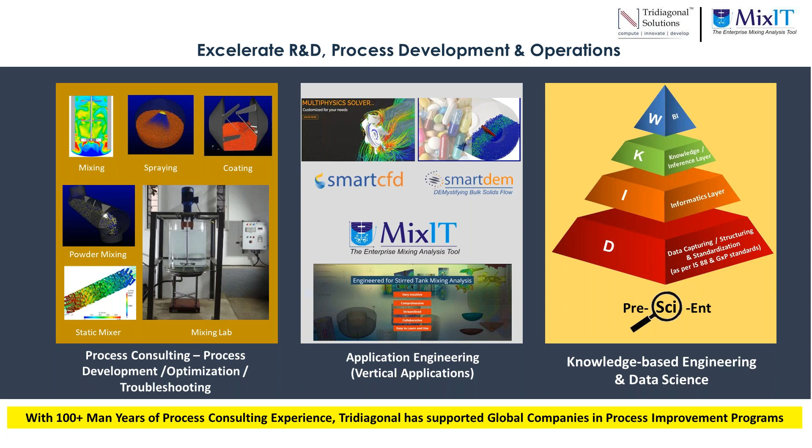With 12 plus years of experience providing the most advanced technologies and solutions to our customers, we work with our customers hand in hand to provide them end-to-end solutions, support, and training through our consulting practices, making sure we are able to solve their process problems and improve their process performance using innovative technologies. So with this brief introduction to Tridiagonal, let's start our webinar.

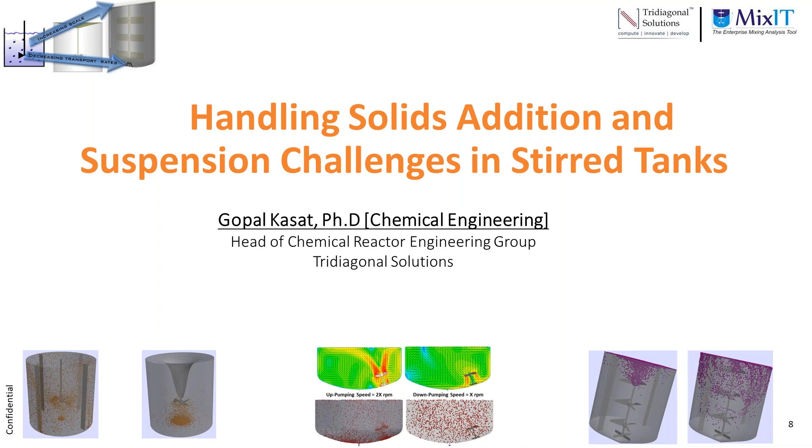I am Gopal Kasat. I am heading the Chemical Reactor Engineering Group at Tridiagonal Solutions. Today we will be discussing how we can handle the solids addition and suspension challenges in stirred tanks.

So what is solid liquid mixing? We encounter it in our day-to-day life, for example when we are adding sugar in water. If we do not stir it with a spoon, the sugar is going to settle at the bottom.

That simple example helps us understand how important it is to suspend solids in the process industry, in our chemical processes, so that maximum area is available and we get effective mass transfer and effective process control when dealing with solid liquid operations.

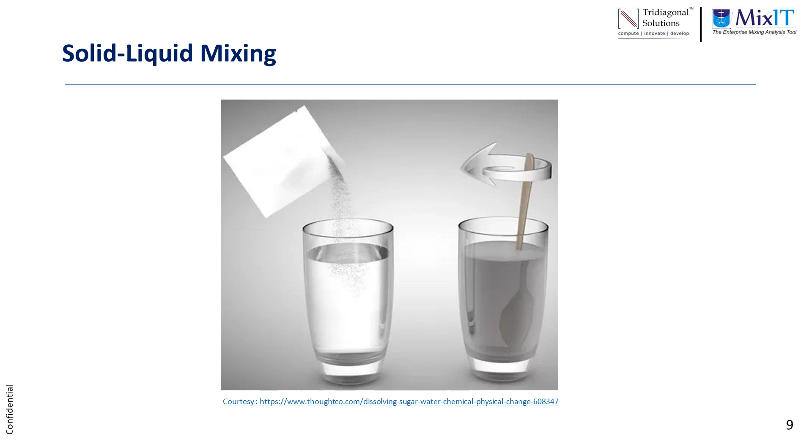When we think about solid liquid mixing in the process industry, we encounter various processes where it is very important, like dissolution, where, as I said, we are dissolving sugar in water. That's a very simple example, but we encounter this day to day in the process industry.

Along with dissolution, we have crystallization, where we need to control the particle size distribution and make sure the crystals are suspended and we have the appropriate particle size distribution.

Precipitation, suspension polymerization, for example forming of resin beads, where we need to control the particle size of a resin bead. In terms of solid catalyzed reactions, we need to suspend the solid so that maximum surface area of the catalyst is available for the reaction.

In the food and beverage industry, we encounter powder dispersion, and in bioreactors, we need to suspend biomass, and there also we encounter the solid liquid mixing problem during our day-to-day process industry operations.

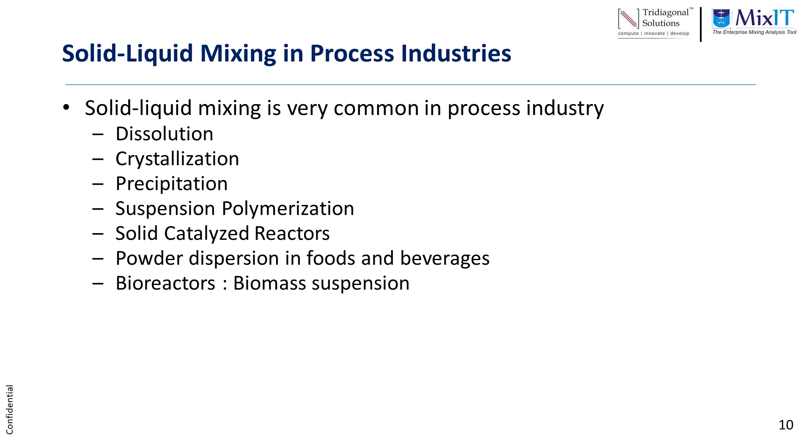So what type of typical things do we do in these problems? Either we are trying to suspend the settled solids, which are typically heavier solids that tend to settle, and we need to ensure they are suspended, or we are trying to draw down the floating solids. Typically, solids are added at the surface, and we need to make sure we are drawing them down and dispersing them properly in the mixing tank.

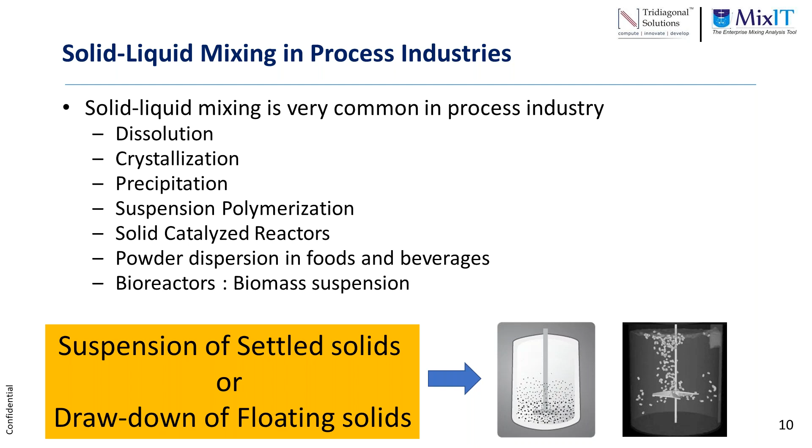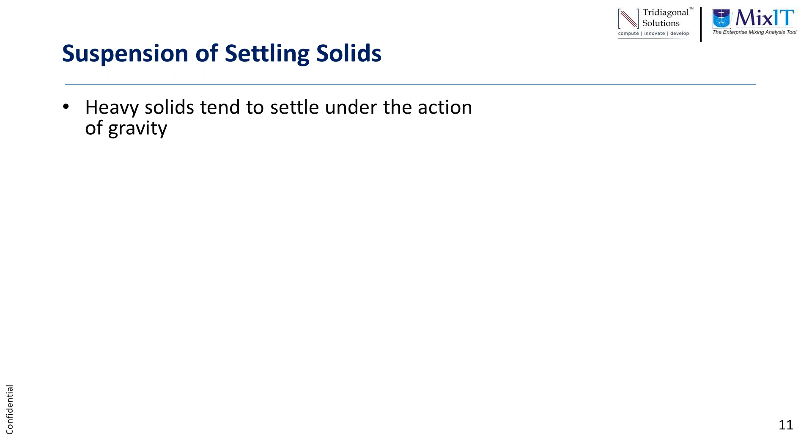So let's understand about suspension of settling solids. Typically with heavy solids, the solids tend to settle under the action of gravity. In order to suspend the solids, the fluid velocities near the vessel bottom need to overcome the settling velocity of the solids.

The turbulent eddies generated because of the fluid action would lift the solids, and then the solids will be suspended in the bulk fluid using the bulk flow generated by the impeller. This is typically the action we encounter in mixing tanks.

The critical design parameters are - we typically use a term called minimum suspension speed. That is the minimum speed at which the solids are suspended off the vessel bottom. They may not be uniformly dispersed, but they are just suspended off the vessel bottom.

In some cases, we need to ensure solids are uniformly dispersed, so we are looking at the level of suspension as well. We can define various levels of suspension based on the type of process we are dealing with: partial suspension, where solids are just suspended off the vessel bottom; complete suspension, where solids are lifted off the bottom and dispersed in the bulk volume; and uniform suspension, where solids concentration is uniform in every region of the bulk fluid volume.

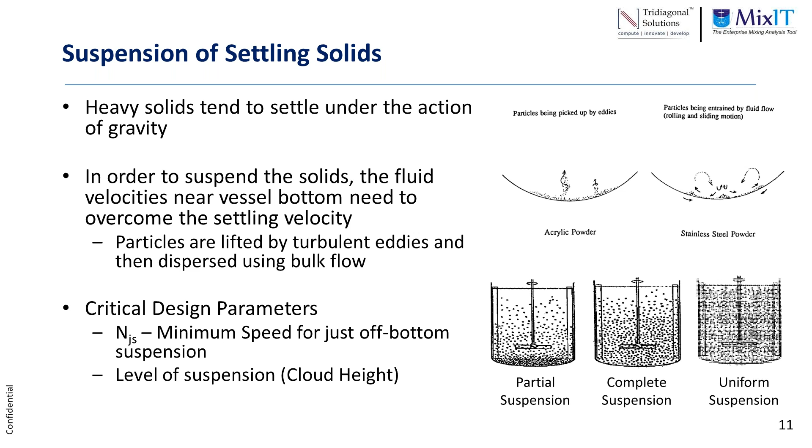So we see that settling solids settle under the action of gravity. Let's understand what happens with floating solids. Solids float due to density difference - the solids are lighter than liquid, hence they may float.

Some solids may have poor wettability, and if we are adding them from the liquid surface, they may float. Even if we are adding lumps of solid, because of the low density, those lumps may also float.

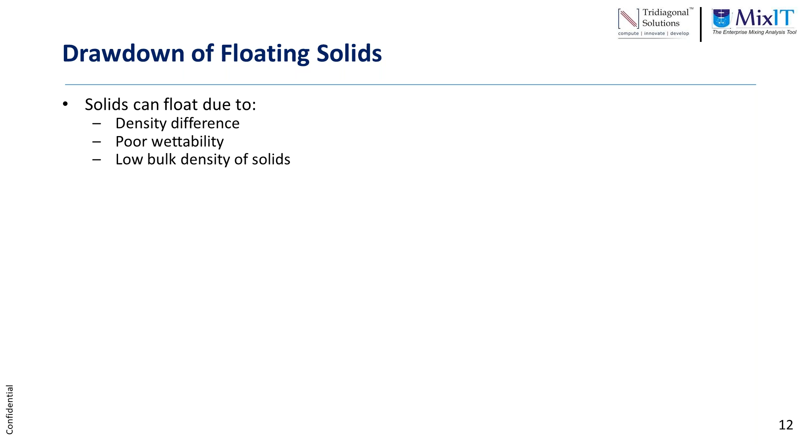So what action is required to suspend or disperse these floated solids? Typically, due to buoyancy and surface tension, the solids will float, and we need to overcome these forces using gravity, drag, and turbulent dispersion force generated by the impeller, so that the solids are drawn down and dispersed in the bulk liquid.

The two key parameters of interest here are NJS, the just suspension speed, and NJD, the just drawdown speed - the minimum speed at which solids are just drawn down from the liquid surface. We also have cloud depth, similar to cloud height or suspension height in the case of suspending heavy solids - here it's the depth to which the solids are incorporated into the liquid from the liquid surface.

While dispersing floating solids, vortex plays a very critical role. We need to ensure a controlled vortex, so that the surface turbulence created helps the initial dispersion of solids, and then the bulk motion of the fluid disperses the solids throughout the tank.

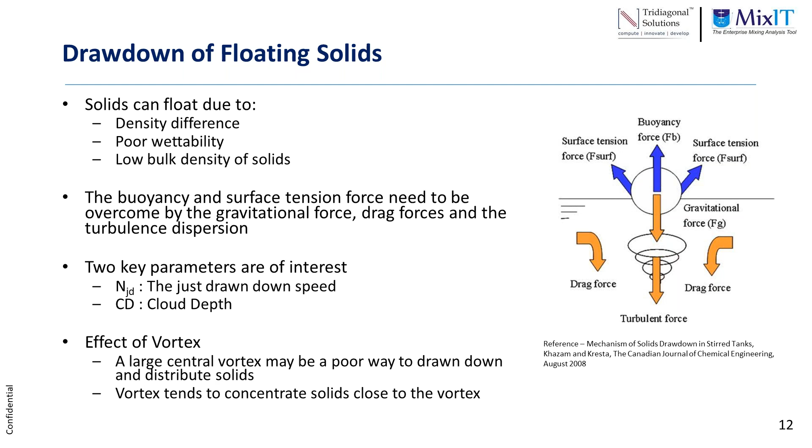So we understood what we need to do in terms of either suspending settled solids or drawing down floating solids and dispersing them. Now let's understand the typical design variables available that impact, or that we can change, to ensure we are able to suspend solids or disperse floating solids properly.

These design variables relate to typical reactor hardware. In the case of suspending settled solids, the bottom shape of the reactor plays a critical role. Also important is what type of impeller we are using - its size, location, and number of impellers. Various impellers are available: some are axial flow, some radial flow, and some provide mixed flow. Which type to use is one of the variables we can change to achieve better suspension.

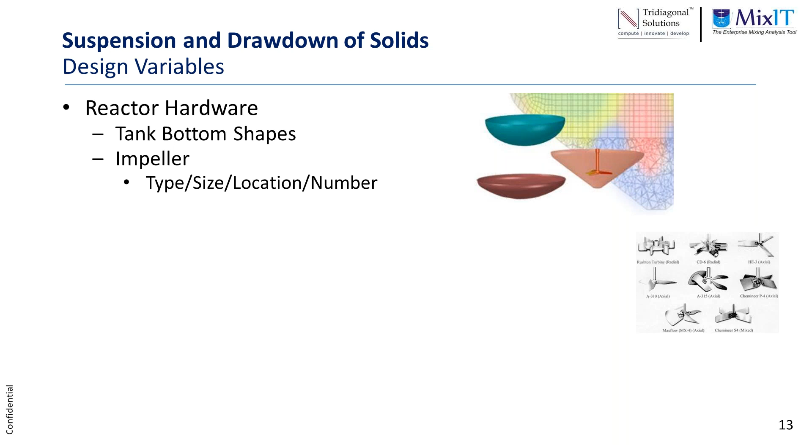One of the important parameters is baffling. How we control the baffling so that we ensure enough suspension as well as enough drawdown of solids is very critical. The baffling is very important. How we provide baffle and how we control the vortex by providing partial baffles may help improve the performance of powder dispersion when the powders are light.

Apart from reactor hardware, there are operating conditions we can control, such as the addition location. We may add at the surface or inside the bulk liquid based on flexibility of operation, or we can control the particle size so that particles are dispersed properly. The surface tension or interfacial tension between the particle and liquid, and the wettability, will play a critical role when suspending solids or dispersing them.

With these design variables, let's understand how we can ensure our operation is in a suitable regime where solids are suspended, and what parameters we can estimate to make sure the process, with given operating parameters, is able to suspend solids and disperse them uniformly.

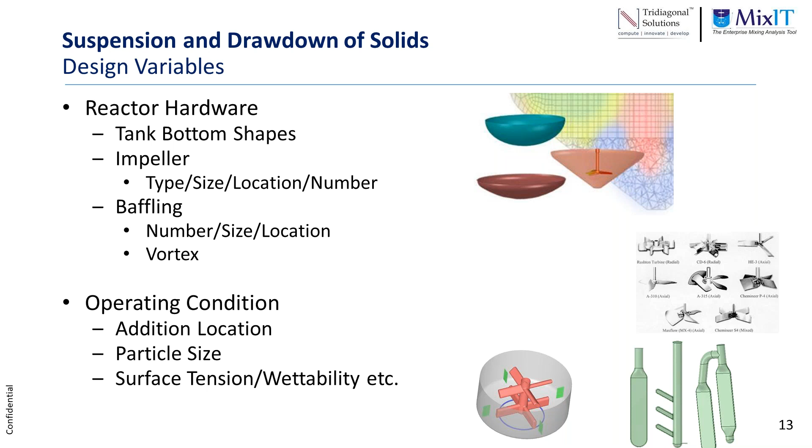For settling solids that need to be suspended, one critical parameter is estimation of minimum impeller speed for off-bottom suspension. There are various correlations in literature, and one well-known correlation is by Zwietering in 1958, where the critical impeller speed is calculated as a function of operating parameters like particle size, density of the particle, density of the liquid, the overall loading of solids, and reactor hardware parameters like impeller diameter.

However, when deriving this correlation, other parameters like the effect of impeller position, impeller to tank diameter ratio, or vessel bottom shape were all incorporated into one single parameter called the S factor. To use this correlation effectively, we need the right value of S factor so we can estimate the right suspension speed and operate at that speed to ensure solids are suspended.

This correlation was developed based on visual observation of the vessel bottom. Zwietering observed the vessel bottom and recorded the speed at which no particle remains stationary on the tank bottom for more than 1 or 2 seconds. That speed was noted as the critical or minimum impeller speed for solid suspension, and correlated with various operating and reactor hardware parameters.

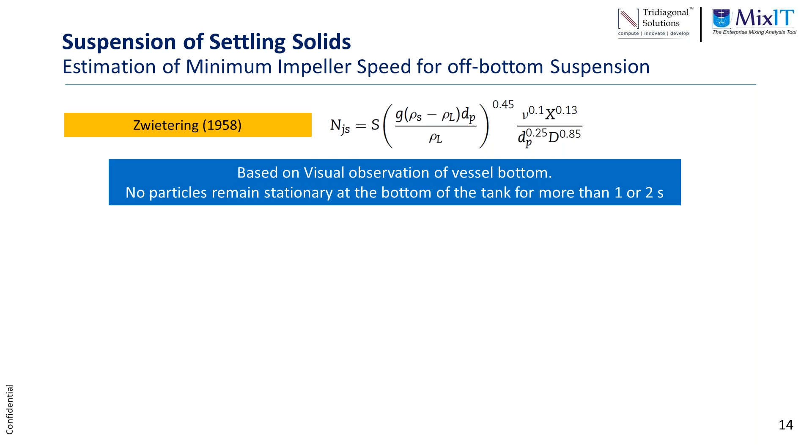Another correlation was proposed in 1978, where various parameters were incorporated, and in this case they also took into account the impeller to tank diameter ratio, with all other impacts recorded in one constant, the Z value.

This equation was based on an energy balance, where the hypothesis was that solids are suspended due to turbulent eddies. These turbulent eddies, at the vessel bottom, help lift the solids, and then the solids are suspended using the bulk flow.

More recently, in 2015, a correlation was published by Professor Grenville, where various parameters from earlier correlations were incorporated. Here they also incorporated the impact of impeller clearance, or impeller location with respect to impeller diameter, as well as the power number of the impeller, with all other parameters incorporated into the constant Z. This work was based on Davis 1986, which describes how particles are lifted, again based on turbulent eddies, and this correlation was backed by experimental data as well.

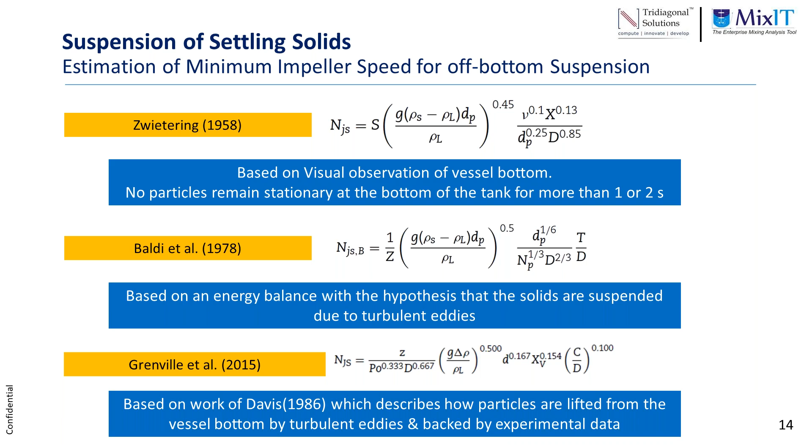So these are a few correlations generally used to calculate the minimum impeller speed for suspension of solids off the vessel bottom. There are many other correlations, but I just picked these three, which are heavily used in the industry.

In terms of suspending settling solids, there are also design guidelines available. Typically, while selecting the impeller, we need to ensure it is an axial flow impeller or a mixed flow impeller with an impeller to tank diameter ratio less than 0.5. Why axial flow? Because the axial flow from the impeller hits the tank bottom and creates turbulence there, which helps lift the solids better.

There are also guidelines available in terms of what should be the clearance and what should be the spacing between impellers if we are working on a multiple impeller system.

Similarly, for baffle arrangement, 4 standard baffles are recommended when we are dealing with suspending the heavy solids off the vessel bottom, and the dimensions of those baffles are also given in those recommendations.

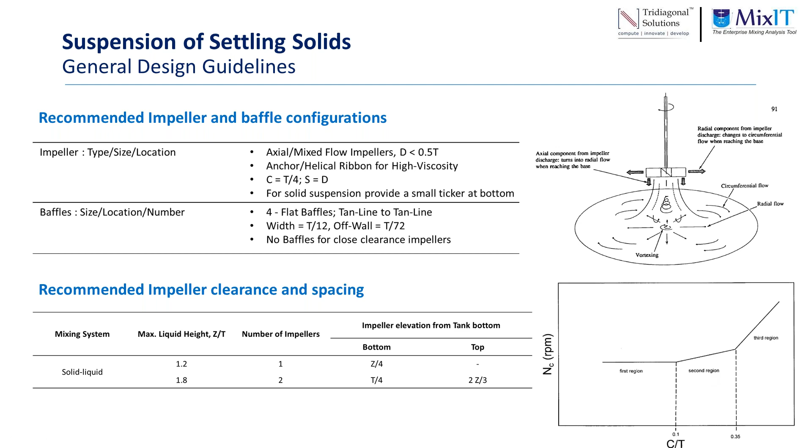So there are guidelines available in case of settling solids. However, for minimum impeller speed for drawdown of floating particles, there are few correlations available, but not much guidelines, because very little study has been done on how to draw down floating solids in the bulk liquid.

The first correlation for minimum impeller speed for particle drawdown was published in 1977, where the particle density, the difference between particle density and liquid density, and the impeller-to-tank diameter ratio were correlated, and then the constant was devised.

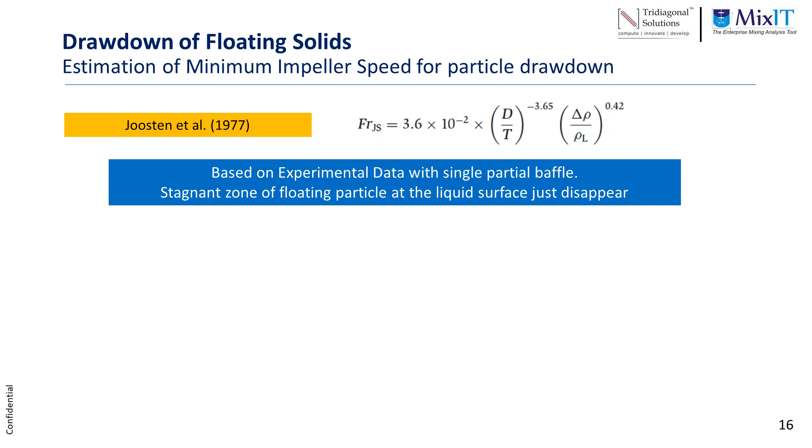This correlation was based on a fixed system where a single partial baffle with an axial flow impeller was used, and the definition was that there is no stagnant zone of floating particle at the liquid surface, and the particles just start to disappear from the liquid surface. That was the criteria to define the just drawdown speed.

Another correlation was published in 1999, where again a similar density difference between the solids and liquid, as well as the solids volume fraction and some other particle properties, were used, and all other impacts were grouped into one constant to estimate the just drawdown speed.

This was based on experimental data with again 4 baffles and a Rushton turbine impeller.

And then there are some general guidelines available in terms of how we can effectively draw down solids by controlling the vortex with a partial baffle and controlling the impeller bottom clearance, so as to draw down the floating solids.

In general, as we have seen, there are guidelines available to suspend solids or to design a system for suspension of solids. Then there are very few guidelines available for drawdown of floating solids. So there is very little literature available on how we can draw down the floating solids and disperse them.

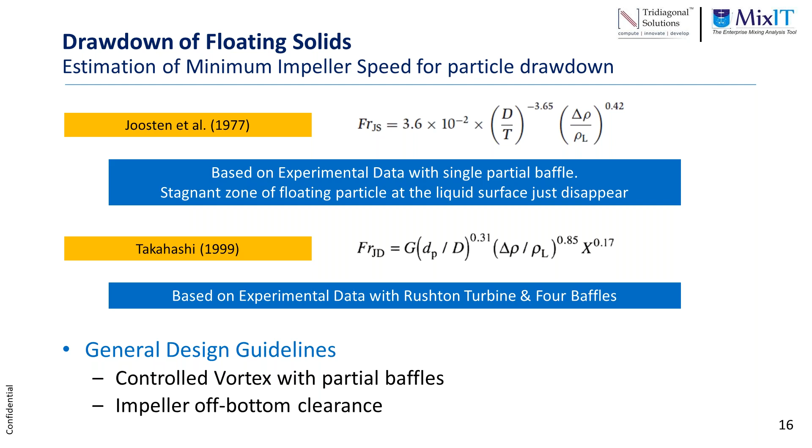Let's try to understand how these empirical correlations can be used, or what could be the limitations of these empirical correlations. So we have seen that for suspension of settling solids, we have a few equations, and for drawdown of floating solids, we have a few equations.

If we look at all these equations, they are heavily dependent on some constants, which are grouped in one of the parameters. For example, in case of Zwietering, we have the S factor. In the equation proposed in 1978 by Professor Baldi, we have the power number. A similar power number is used in correlations proposed by Professor Grenville, and also in case of particle drawdown speed estimation, we also have a constant.

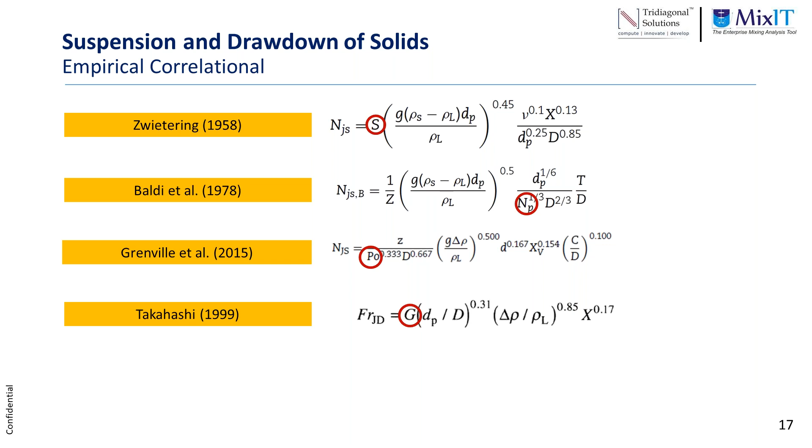These constants have been derived while proposing these correlations. However, they are for a very fixed system, as some of the authors have used experimental data only for Rushton turbine or only for pitch blade impeller. So there are limitations in that these constants are not available for all systems, and we know that we encounter very non-standard configurations in process industry.

So how can we use these correlations with non-standard systems, because they are very system specific and heavily depend upon an impeller constant like power number and some other factors which are dependent on the various vessel geometry and configuration of the impeller.

So with a few limitations in these correlations, let's see how we can use a few other technologies to ensure that we understand the solid suspension process, or the solid dispersion process, better, and improve our process performance by making sure that it is good.

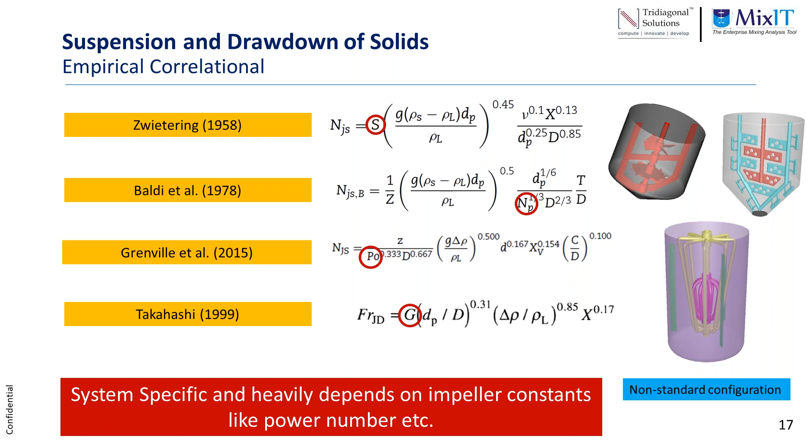With the computational fluid dynamics model, we can definitely use it to understand the performance of our process a priori, and use those results for analysis, troubleshooting, and scale up. The CFD model provides us detailed understanding of the flow pattern, and how the solids are getting suspended based on the flow pattern or the location of the impeller.

And we can make a judgment based on this: what is our suspension speed? We can estimate that, as well as understand if we need off-bottom suspension, what should be the speed, and if we need complete suspension, what should be the impeller speed. So we can use these detailed insights from the CFD model to improve performance of our solid suspension and dispersion processes.

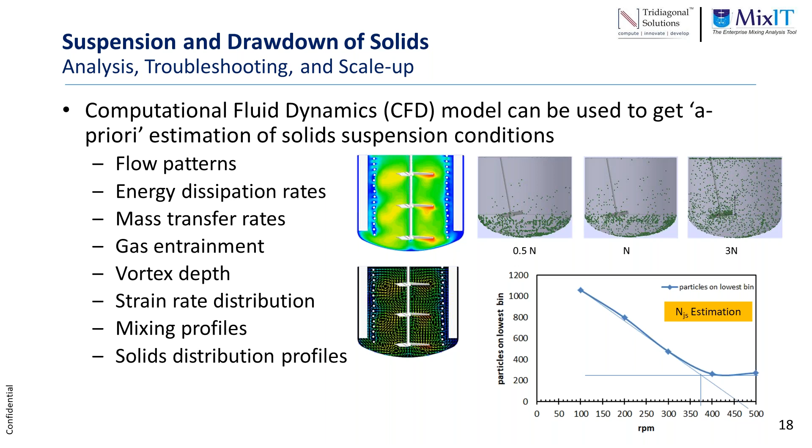Let's try to understand, using some case studies, how we can make use of this computational fluid dynamics model to improve our process performance. I will discuss some case studies where we have helped our customers, through our consulting practices, gain more insight into their suspension processes, and then improve them by making small changes in their systems.

So the first example is where we can understand how baffling will impact the overall process of suspension, and what could be the impact of baffles. If we look at the correlation for this system, the minimum speed for this system is 280 RPM, but that minimum speed is derived at a condition where we have 4 baffles.

Now what if we operate at the same speed, or maybe a higher speed than that, let's say 480 RPM, but we remove the baffles or change the baffle configuration? Let's try to understand, using computational models, what is happening and how the suspension will get impacted when we change the baffle configuration.

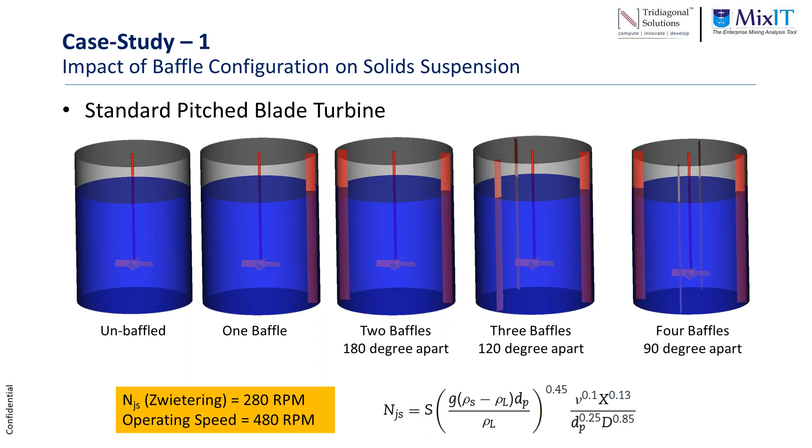So when we have no baffle, we get a vortex in the unbaffled tank, and we see if the solids are suspending. The solids are initially settled at the bottom, and we see that because the solids are only revolving on the vessel bottom, a few are getting suspended, but bulk of the solids are still settled on the vessel bottom.

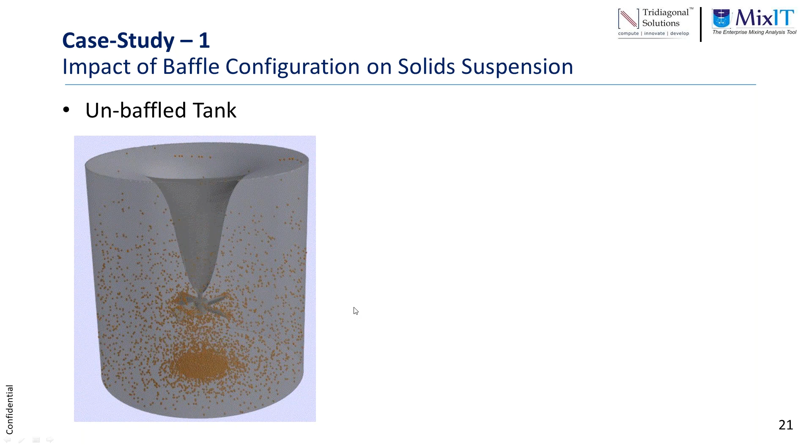Why is this happening? Because in the case of the unbaffled vessel, the flow is very rotational, and because of this rotational flow there is no actual motion of the solids to get dispersed. Bulk of the solids are settled below the impeller, and that's why even if we are operating at a speed almost 1.5 to 2 times higher than the just-suspension speed, we are not able to suspend the solids properly in the tank.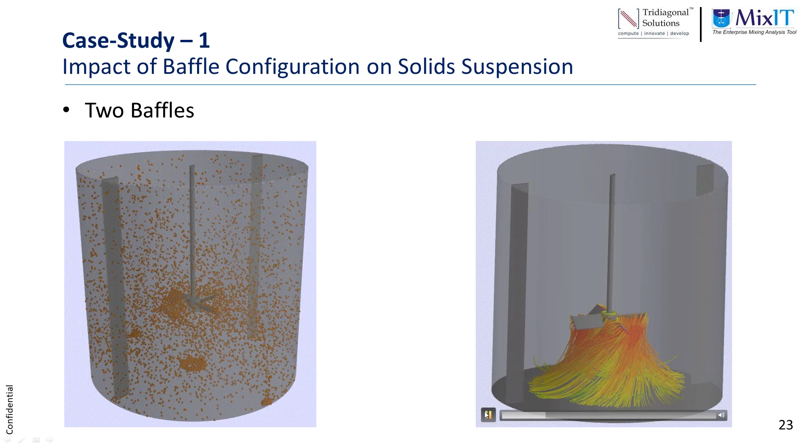Similarly, with the addition of two baffles, we see significant improvement. Now the solids are suspended more, and they are first swept to the vessel wall and suspended from there. There is some solid still settled near or below the impeller, which is the dead zone, and we can relate it to the flow pattern — now more of an axial component is there. The impeller flow is more directed towards the vessel bottom with addition of the second baffle, and it helps in improving the suspension.

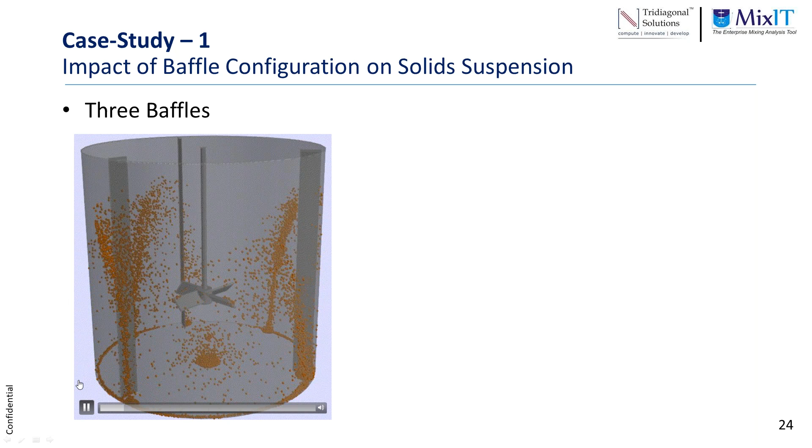Addition of a third baffle will again improve the performance. We do see that more solids are getting suspended now, and we get more uniformity in the suspension.

This flow pattern is again more on the axial side than the rotational side. The axial component is increasing in the flow, and the rotational component is reducing, and at 4 baffles we see very good suspension.

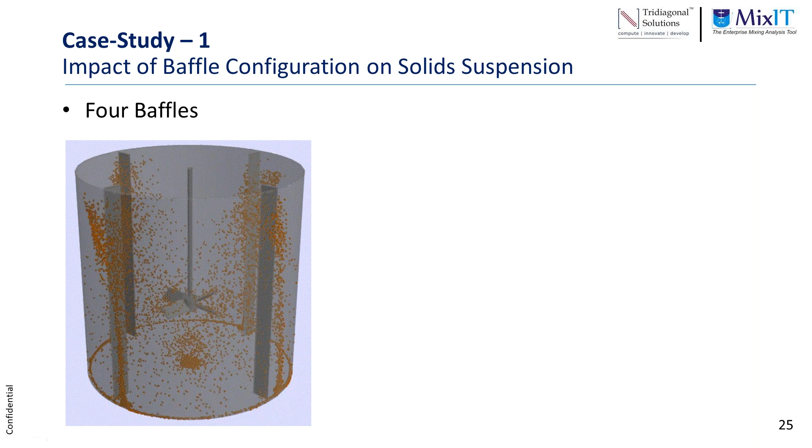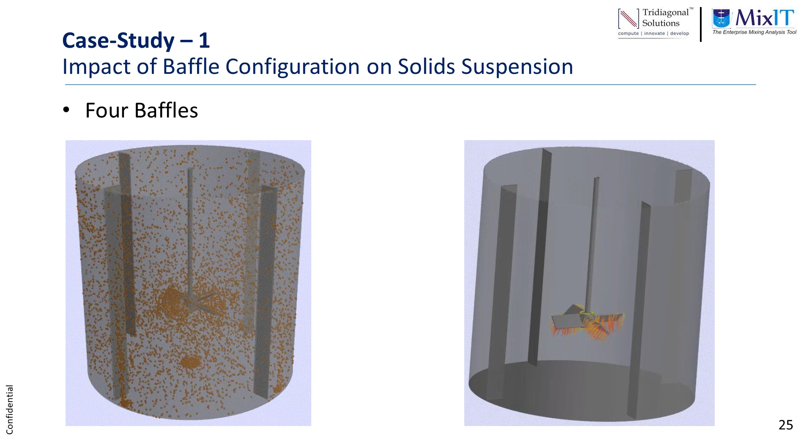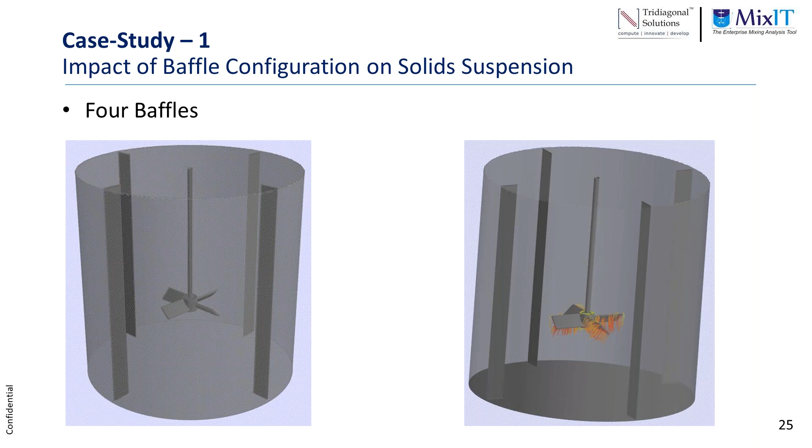The flow is more axial overall from the impeller, helping suspend the solids uniformly throughout the vessel region. This is how we can see that the suspension of solids is being impacted by the baffle configuration.

Similarly, we have helped our customer improve their drawdown process. With 4 flat baffles, we can see with the RCI impeller how the solids added at the liquid surface get dispersed properly.

However, if we only use one baffle, we get a lot of rotational flow, and the powder added at the liquid surface remains at the liquid surface. A small quantity gets drawn down along the shaft, with a lot of rotational flow.

Similarly, if we change the baffle, as is typical with a beavertail baffle in a glass-lined vessel, we see a similar rotational pattern with the RCI impeller, and we may not get better dispersion of the powder added at the liquid surface.

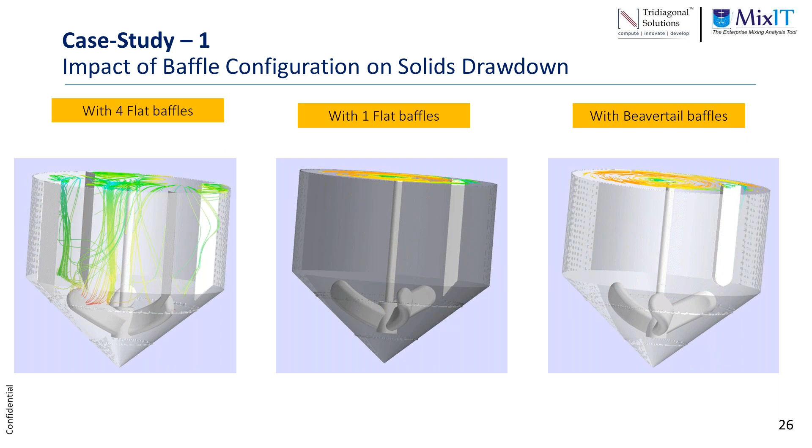Overall, we see a significant impact of baffle configuration on the solid suspension and dispersion process. Proper baffling needs to be ensured for efficient suspension and drawdown of solid particles. Available correlations do not explicitly account for the impact of baffles, so we use CFD simulation to get detailed insight, understand the quality of suspension better, and improve the process with proper baffling.

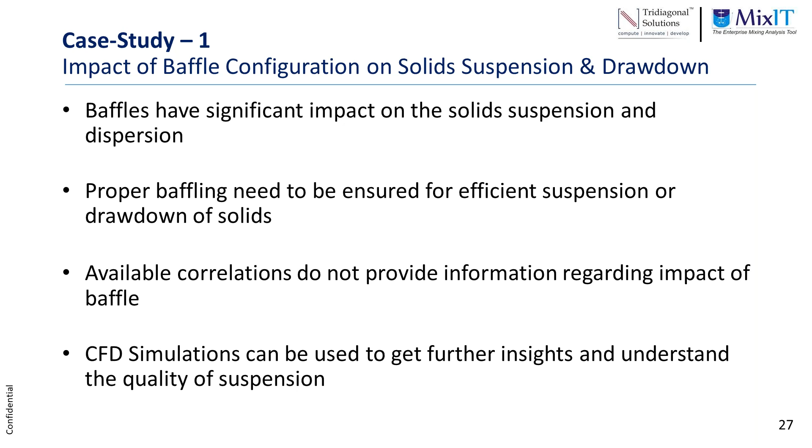The second example is where we helped our customer estimate NJS to improve their process. It was an RCI impeller with very different baffles, which were off-center, with 2 flat baffles and some probes incorporated in the vessel, operating at 320 RPM.

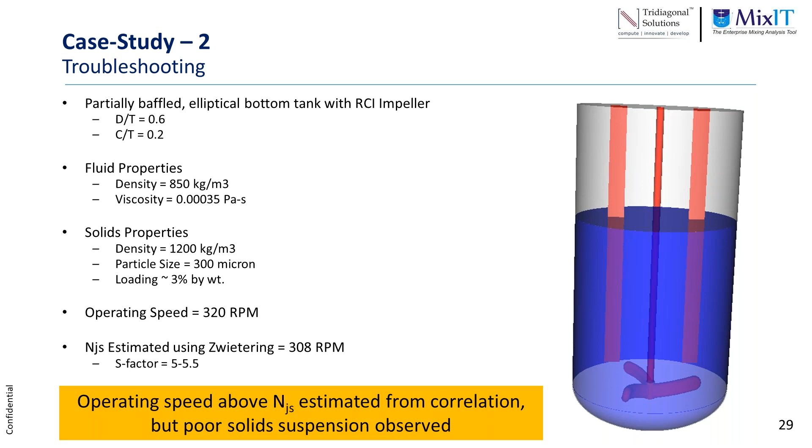The estimated suspension speed using the Zwietering correlation, with an S factor of about 5 to 5.5 for the RCI impeller, was about 308 RPM. The operating speed was much above the just-suspension speed, but still poor suspension was observed.

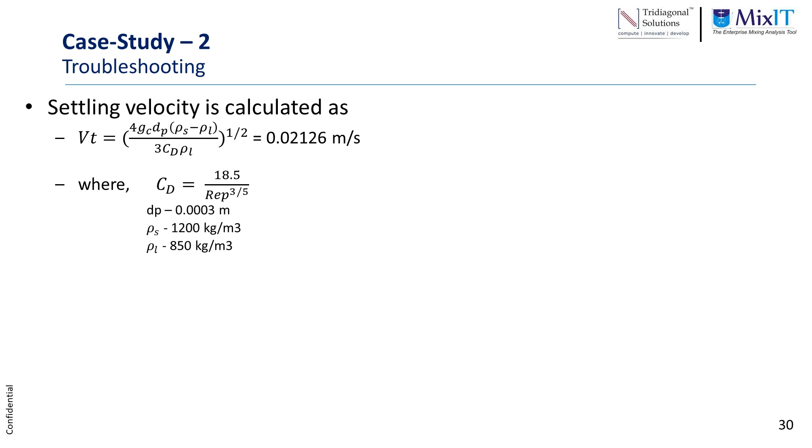So we calculated the settling velocity of the solid particles, then estimated the fluid velocities in the tank, and found that the fluid velocities near and below the impeller bottom are less than the settling velocities of the solids.

Calculating the upward velocities of the liquid that would lift the solid particles, we found those are also less than the settling velocity. This is why the velocity near the tank bottom is not sufficient to suspend the solids, resulting in a dead zone formed below the impeller.

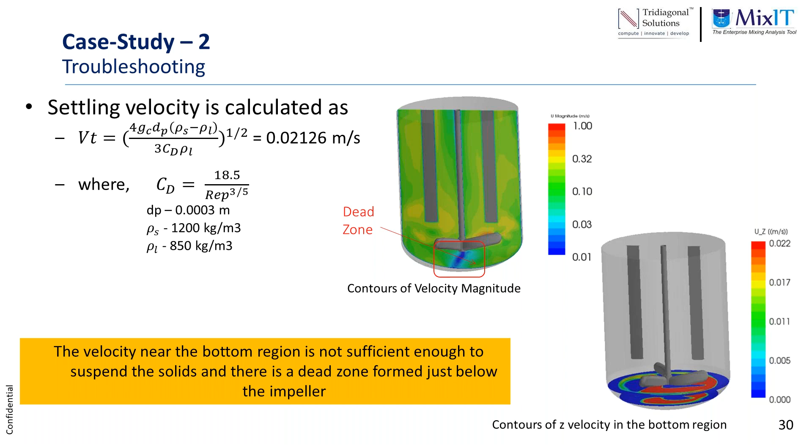Because of this dead zone, the solids keep rotating around the impeller and vessel bottom only, and are not suspended.

By changing the impeller position as well as the impeller speed, we were able to mitigate this problem of solid suspension.

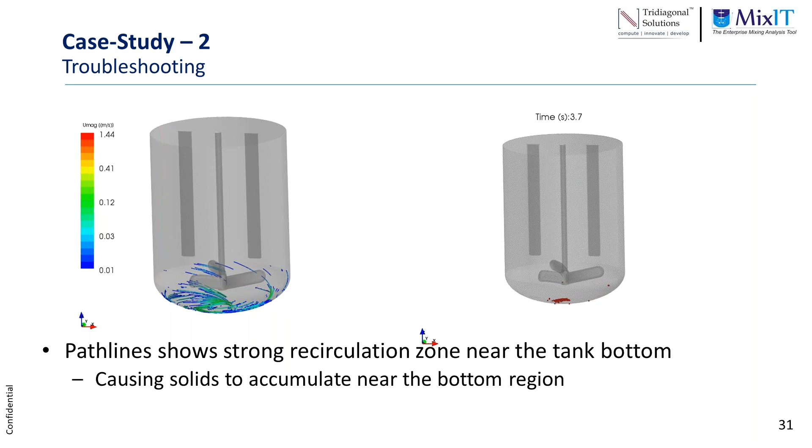With CFD analysis, we can definitely get more insight and understand the basic cause of not getting proper suspension, then mitigate those problems through proper troubleshooting, whether by changing impeller position, changing the impeller, or locating it appropriately and rotating at the right speed.

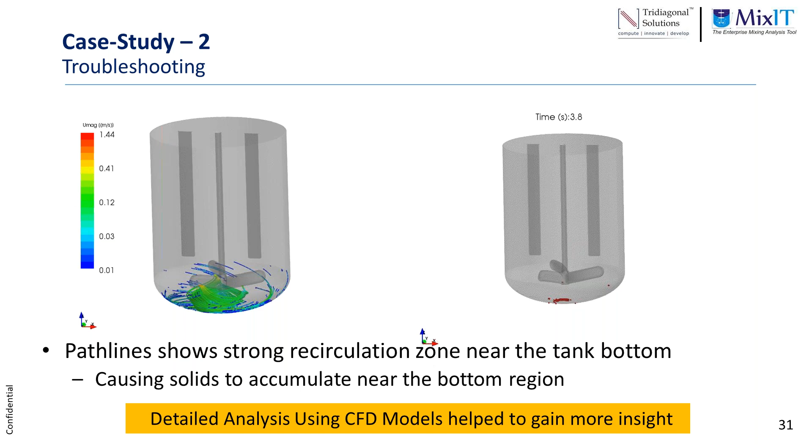The third example is again based on troubleshooting, but this time the problem was impeller pumping direction. A tank with a bottom-mounted impeller was being used to prepare a pharmaceutical intermediate, where heavier solids, with density almost double that of the liquid, needed to be added at the liquid surface and dispersed.

The operation was observed, and the solids were found to settle very much at the vessel bottom and near the impeller.

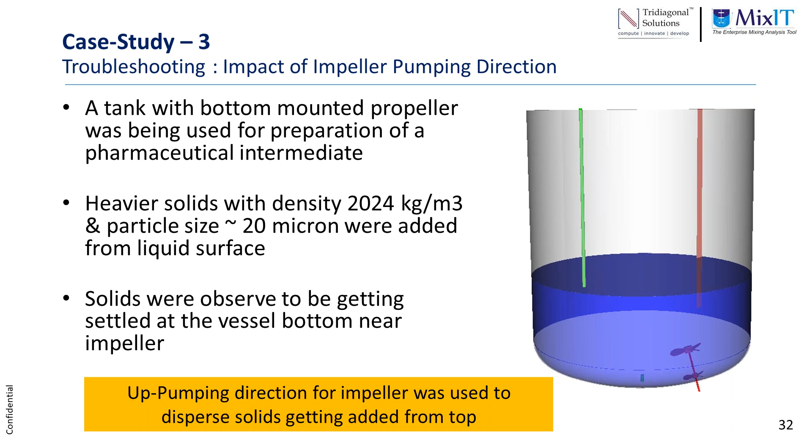For this operation, the up pumping direction of the impeller was selected because it was thought that with the up pumping direction, the solid suspension would be much better. So the pumping direction was selected, and then when we tried to understand what is the problem, we see that because of the pumping direction, the solids are being accumulated near the vessel bottom even at a very high speed.

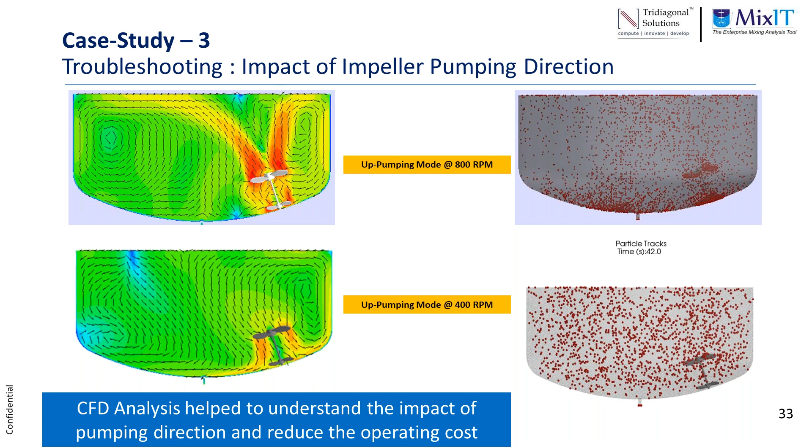When the direction was changed, even with a low speed of about half the earlier operation speed, we were able to get good dispersion. So a small change in the impeller rotation direction helped us improve the overall process performance and even reduce the overall operating cost, because now the speed is reduced by almost half.

Similar troubleshooting was done in another operation where a pitch blade turbine was operated in an up pumping mode, and at the given RPM there was a bulk of solids below the impeller bottom. Now with changing the direction of rotation, the solids were able to suspend properly. If we do the quantification analysis of the number of solid particles, we see that earlier with the up pumping mode, heavy solids were at the vessel bottom. Now with the down pumping mode, we get better suspension and the solids are much more lifted from the vessel bottom. So detailed insights using CFD are definitely helping to understand the problem, and small changes in the direction of rotation help improve the overall process performance and get better results from our processes.

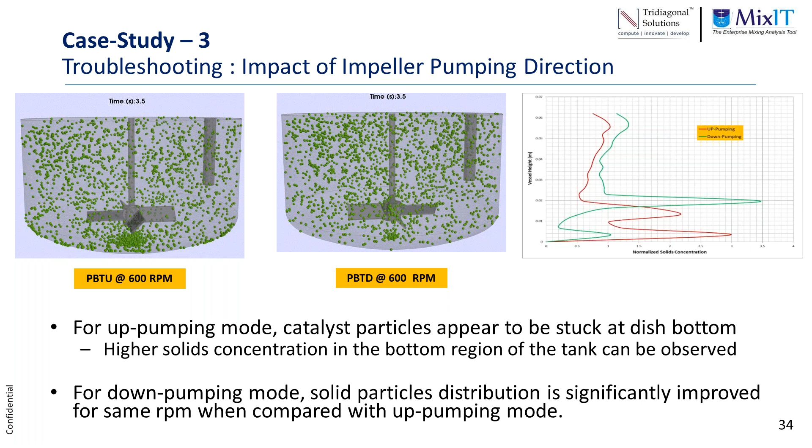Another example is a multiple impeller system where the problem was drawing down floating solids. The density of the solids was less, so lighter solids were there and these kind of floated. The particle size was around 6 mm, and the solids were observed floating on the liquid surface even after increasing the speed. The impeller direction was up pumping, and in this case it was selected to ensure that the up pumping motion of the impeller would help create surface turbulence and draw down the solids.

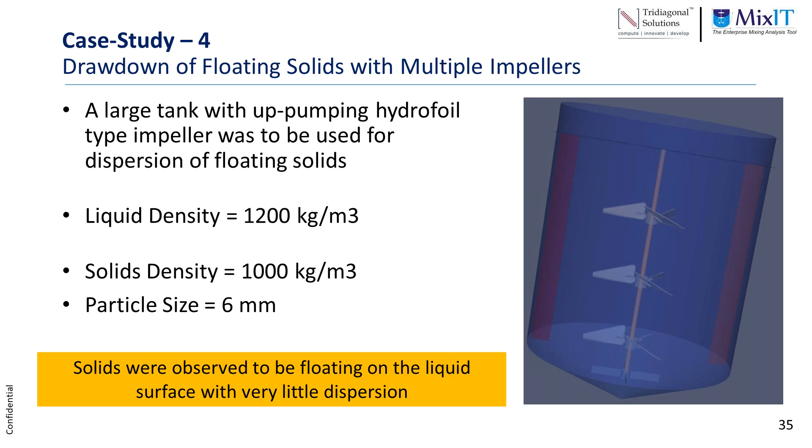However, when we studied the flow pattern, we saw a recirculation loop created in the top region of the vessel, because the top impeller was much away from the liquid surface. The analysis of flow pattern revealed this secondary circulation loop, and because of this the solids were just getting circulated around the top region of the tank and were not getting dispersed properly in the rest of the tank region.

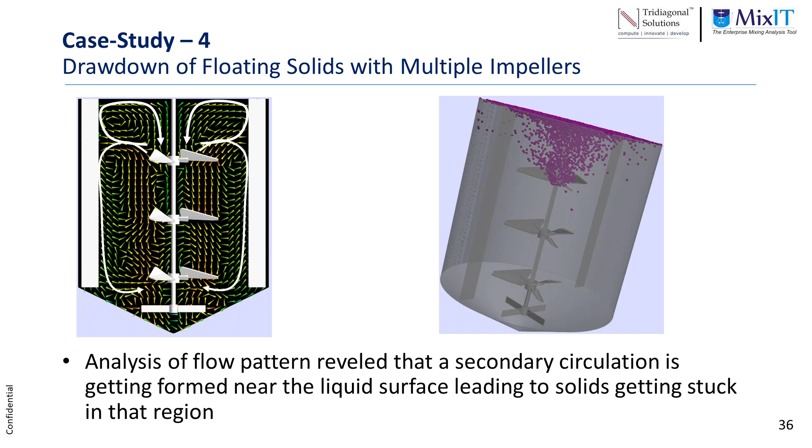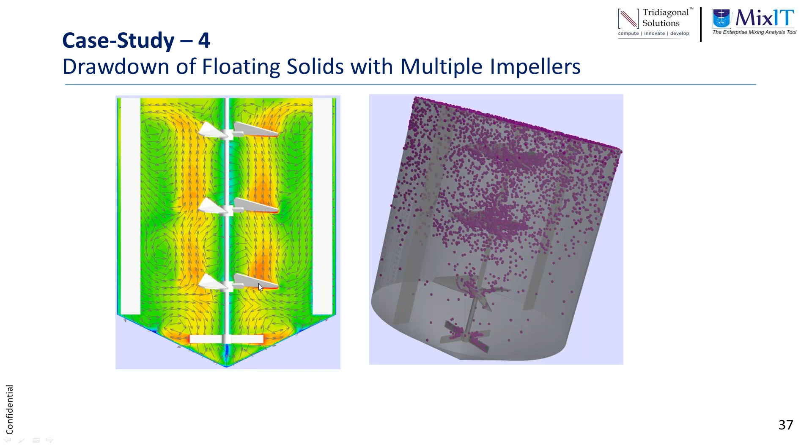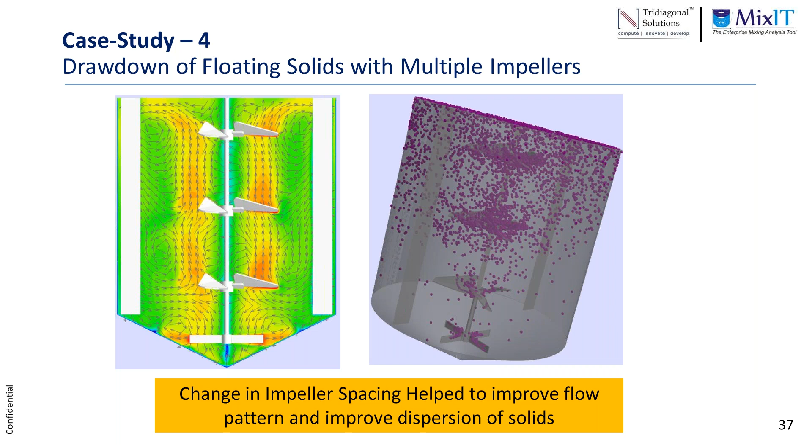So we suggested changing the clearance between the impellers, locating the impeller properly, and moving the top impeller closer to the liquid surface. With this, we were able to get a single circulation loop, and this helped improve the overall dispersion of the particles and get better dispersion just by changing the location of the impeller. So in this case, change in impeller spacing helped improve the overall flow pattern and improve the dispersion of solids from the liquid surface.

So we can get various insights and troubleshoot the overall process problems, and make sure that with small changes like arranging proper baffles, changing the impeller pumping direction, or having a proper location of the impeller, we can improve the process performance.

However, we can use these CFD models to also estimate the NJS in case we are not able to estimate because the correlations are not applicable to our system. So here are a couple of examples where we have estimated NJS using CFD models and validated them against experimental data.

In one of the cases, experimentally the NJS was measured using an FBRM probe, where the solid concentration or number of particles near the liquid surface were monitored, and based on those number of particles and the change in number of particles with impeller speed, the NJS or suspension speed was decided.

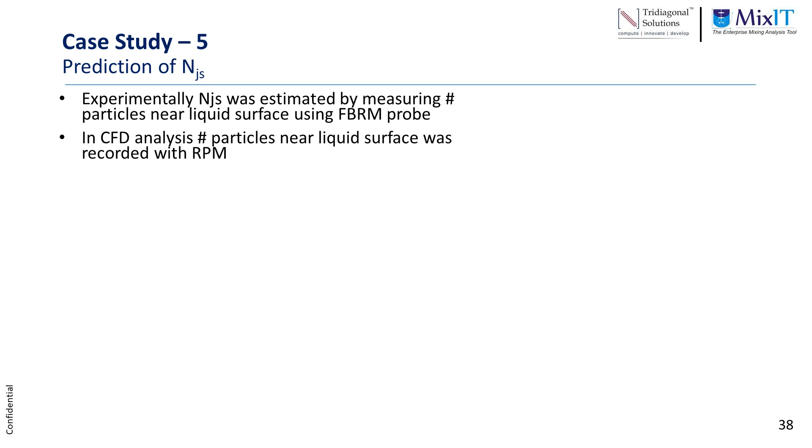We devised a CFD method where the number of particles near the liquid surface were recorded with RPM, with various RPM, and simulations were done at various speeds as was done in the experimental method. The number of particles in the top region of the tank were recorded and plotted against the impeller speed, and we see that after a certain speed, the slope of the curve changes and we see very little change in the number of particles.

That means the suspension has been achieved, and after this, even if we increase the impeller speed, there may be little improvement in suspension. The predicted speed of about 50 rpm matches very well with the experimental measurement of about 50 RPM. So we can see that CFD models can be used to estimate NJS even in cases where correlations may or may not be applicable, by doing quantitative analysis measuring particle concentration in various regions of the tank.

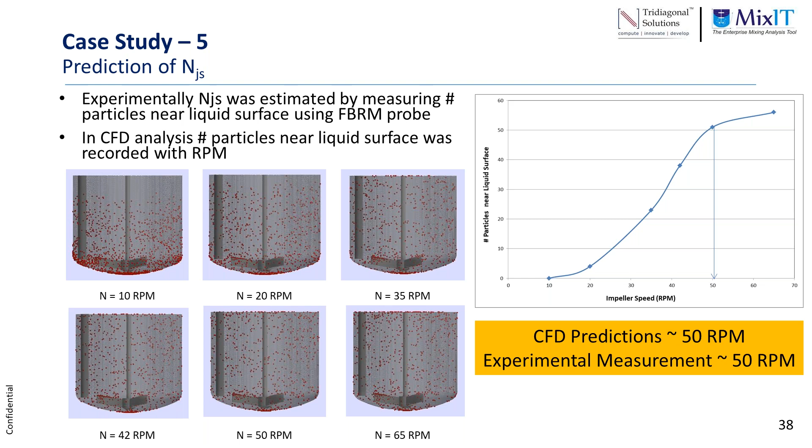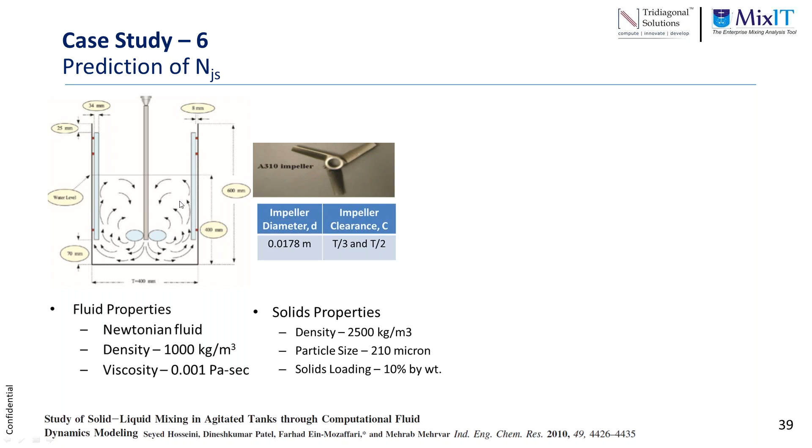A similar exercise was done to validate the methodology, using literature from 2010 where an axial impeller was used to prepare a suspension and study its quality. The tank was divided into a number of bins, and numerical simulations using the CFD model tracked the number of solids in different bins. The particles in the lowest bin, near the vessel bottom, were recorded with impeller speed, and the point at which the curve changes, or shows no further change, was recorded as NJS. This predicted NJS compared very well with experimental results.

We also validated this method with respect to changing the number of bins - what happens if we divide the tank into 10, 20, or 40 bins. Again, we got predictions within plus or minus 10% deviation, matching very well with the experimental value of 350 rpm. We were able to get around 360 and 380 rpm with our numerical method.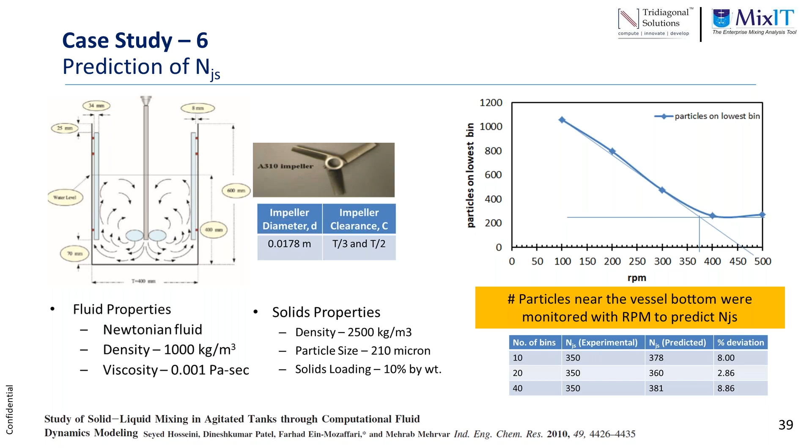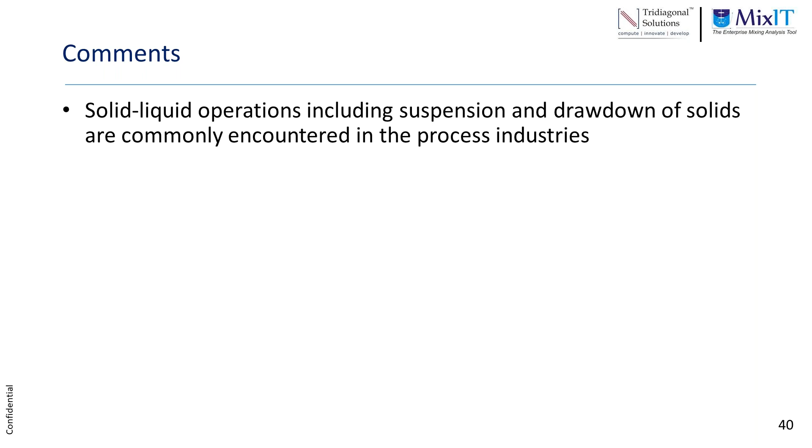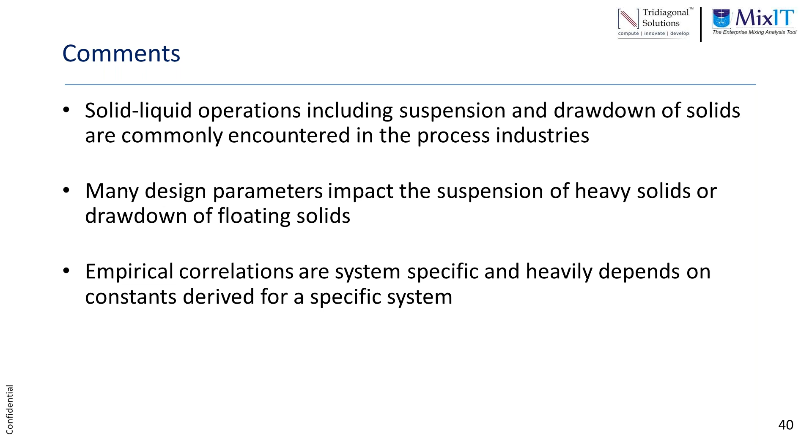Overall, solid-liquid operations, including suspension and drawdown of solids, are commonly encountered in process industries. Many design parameters impact the quality of suspension for heavy solids, or drawdown of floating solids. Empirical correlations give us better insight and estimation of critical impeller speed, but they heavily depend on constants derived for specific systems. If our system is away from that specific system, which is the general case in process industry, we face limitations. In those cases, CFD analysis provides detailed insight and helps us troubleshoot problems and scale up effectively.

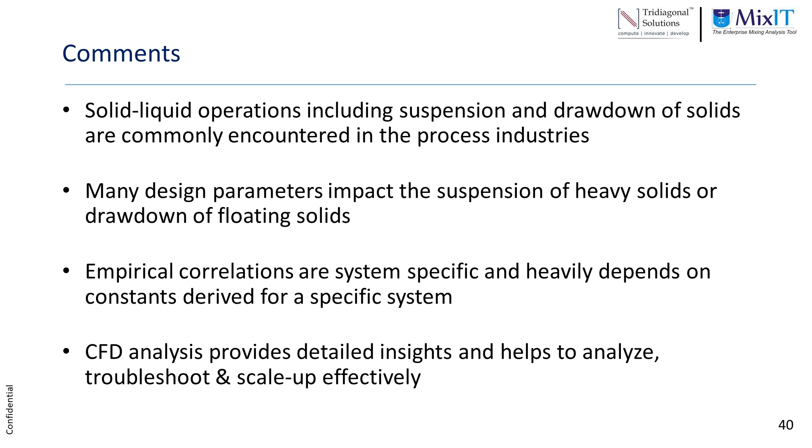To do CFD analysis, we can use various CFD tools available. However, as a process engineer, learning CFD and spending time doing these simulations could hamper other operations, and we may not need deep expertise in CFD analysis to benefit from it.

So at Tridiagonal, we have developed a software tool we call MixIT. It is an enterprise mixing analysis tool which helps process engineers use both empirical correlations and the power of CFD to understand their process performance better, in a fully automated way. The CFD models are fully automated, so process engineers don't need to worry about learning CFD - they can do the analysis at the click of a few buttons. We support various impeller configurations, correlations, and different rheologies in MixIT software, so process engineers can use it to gain detailed insight into their process performance.